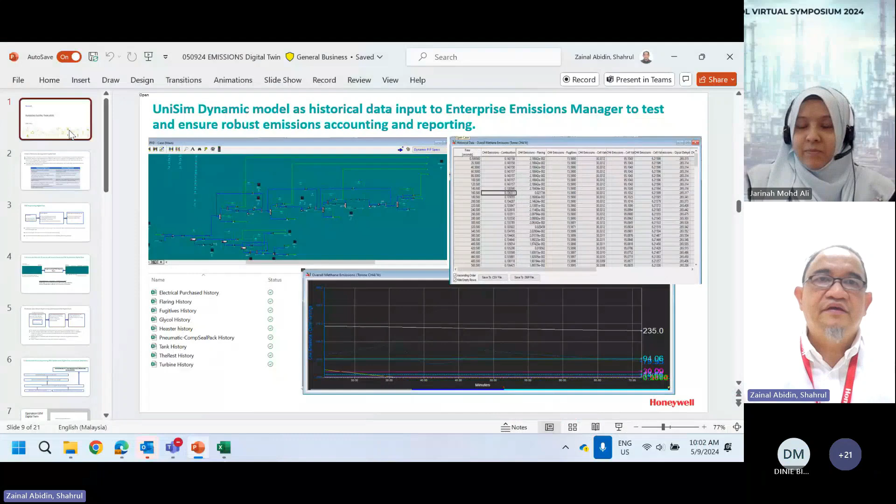My topic today will basically be on the emission digital twin. This is very close to my heart. You can see my screen? Good. The emission digital twin is very close to my heart, the reason being that it's a combination of sustainability and process modeling. For 30 years with Petronas, I was doing process simulation from my day one in Petronas until the day I retired, and I've used many process simulation tools throughout my life.

The emission digital twin is a representation of the emission, especially for greenhouse gases, GHG, and it can be categorized into two types of emission management digital twin, namely the engineering digital twin and the operation digital twin. What this emission digital twin does is combine a process simulation model and operation historical data. Meaning you cannot say to your boss that you don't have the data from the plant or operation, because you can actually generate those data from a first principle model.

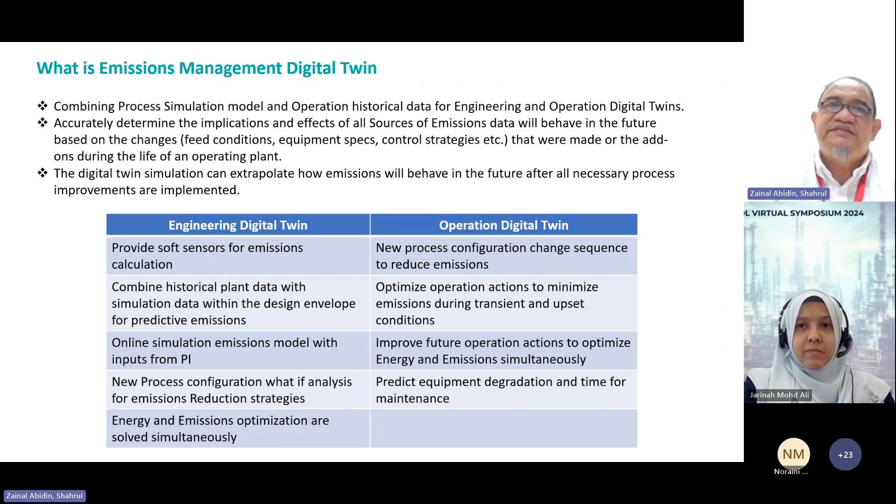When you want to come up with a digital twin data historian or data lake, you need to combine process simulation data, which some people call synthetic data or simulated data, with the operational data so that you have a complete data lake throughout the operating envelope for the process of interest. If you rely solely on operational data, typically it won't cover the whole operating envelope. That's the reason you need to combine the process simulation model data with operational data.

With complete operating envelope data, you can accurately determine how all sources of emission will behave in the future based on your process condition change. It can be a feed condition change, feed composition, temperature, pressure of the operating condition, and it can also be equipment spec or control strategies. But equipment spec and control strategies are more related to the operational digital twin.

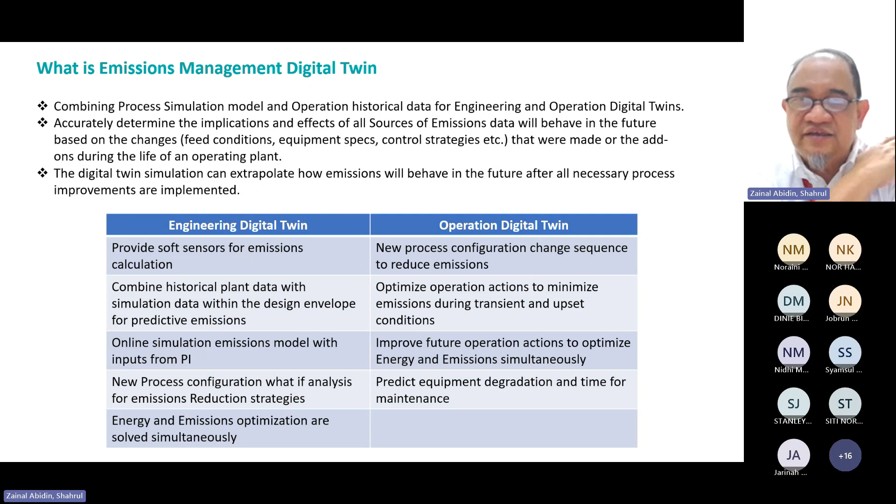Then you can also use operational digital twin to improve future operation action to optimize energy and emission simultaneously. But this time, the operation digital twin is in dynamic mode, so that you can actually see how the process is changing with time by looking at the energy and emission simultaneously. And at the same time, you can also put in the equipment degradation. You can predict the equipment degradation and timing, and tie in the findings with the maintenance team.

Okay, moving on. This is the simplified architecture of how the engineering digital twin looks. So you have your data historian, or in this case, I just use PI system, and you have the real-time data, including historical data. Then you combine this PI historical data with UniSim. In this case, at Honeywell, we are using the UniSim model. You can use any other simulation tool like Symmetry or HYSYS.

Then using the simulation model, you can come up with the first principle plant model. You can do energy optimization. You can do emission soft sensors. You can also do what-if analysis in terms of emission reduction. Then finally, you have this dashboard of engineering digital twin, where you can achieve emission optimization as well as emission reporting. Basically, the engineering digital twin combines transmitter measurement emission input data and actual plant simulation data soft sensors to create the emission digital twin.

And it can be done accurately for all 13 emission sources, and also historical trending of the emission for all the 13 sources identified in OGMP. And you can also use engineering digital twin to generate the inferential model to represent the hard sensors, so that the hard sensors can be relocated to other places, and you can use the hard sensor to tune the soft sensor model from time to time, especially when you detect that the soft sensor or engineering digital twin starts drifting in terms of giving you the accurate result.

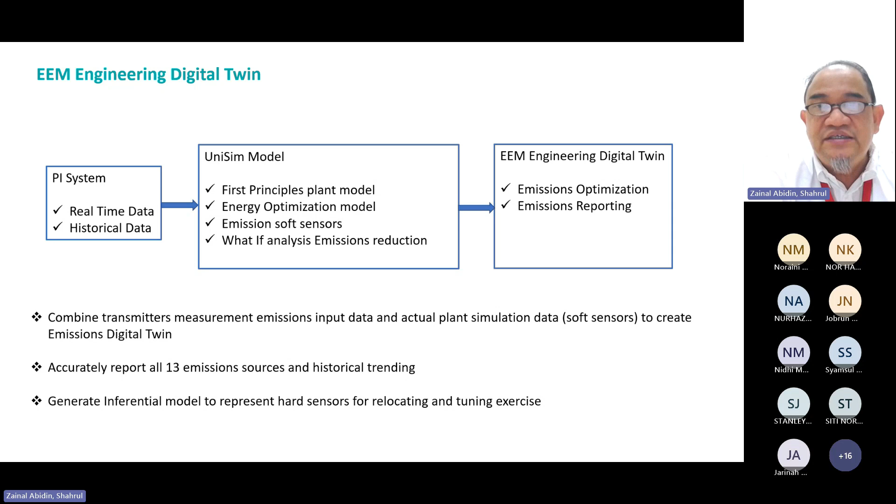So soft sensor is good. Reason being, you cannot put hard sensors all over the place because hard sensors are very expensive. And that's the reason that at Honeywell, we really recommend soft sensors as well, to come up with the inferential model for your particular emission source, so that from time to time, you only need a small number of hard sensors to retune your soft sensor in the case where the model starts to drift.

Okay, this is some graphical information, and you can see that first you need to develop the Unisim model for your process. In this particular case, it's an upstream model, and you combine it with your LDAR report to segregate between leakers and non-leakers, and then you start to model the fugitive emission coming from the LDAR report. And with sufficient emission data and an inferential model, a fugitive model can be developed as well.

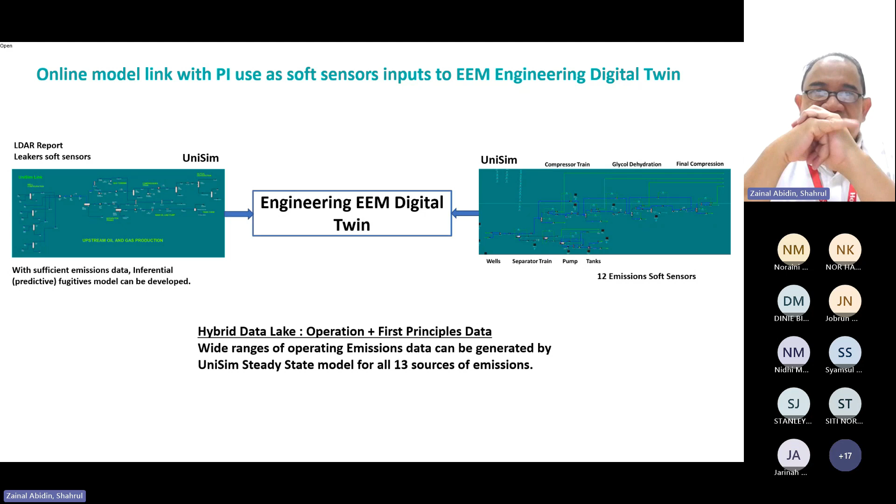Meaning you can see from year by year how the leak propagates with time. So from there you can collect the fugitive data year by year, and from there you can have machine learning to actually predict what will be your fugitive emission for all the devices identified in the LDAR report. LDAR meaning leak detection and repair.

On the left, you can see those are for fugitive, and you can use the same model to model the other 12 emission sources for the soft sensor in terms of flaring, venting, stationary combustion, pneumatic devices, acid gas removal, storage tanks, and so on. You can do it in process simulation tools. So, in short, the engineering digital twin is a hybrid data lake of operational data plus first principle data, and a wide range of operating emission data can be generated by the process simulation tool for all 13 sources of emission.

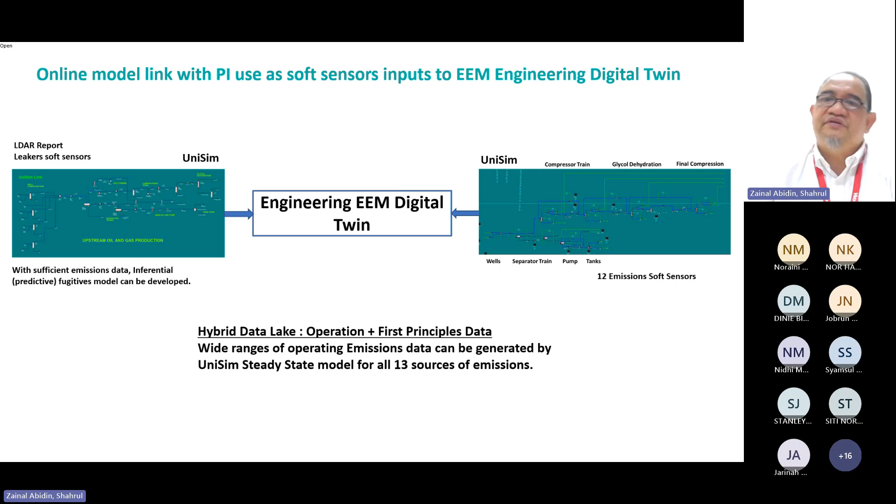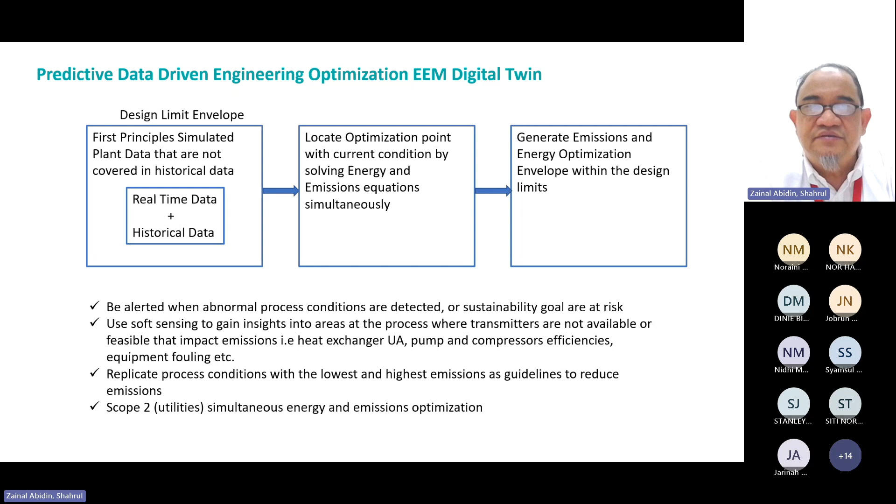So you can trend at what condition your emission is the lowest and highest. The lowest emission and lowest energy, or energy optimization, is the one that you want to replicate. And the highest emission is the operating condition that you want to avoid. So it will give you actionable insight, the do's and don'ts during operation, in order to get energy and emission optimized simultaneously. And you can also do scope 2 emission of the utilities in terms of simultaneous energy and emission optimization. All right, moving on.

This is just the optimization digital twin in terms of graphical representation. Again, we move from the bottom, historical plus real-time plant data historian. And you combine it with the first principle simulated data, then you have this data-driven model within the design envelope. Then you do the predictive and optimized energy and emission model. And finally, you do the prescriptive action to reduce the emission.

And we have the data-driven model on the second layer from the bottom. And this is where you will send it to your emission dashboard. In Honeywell, the dashboard is called Sustainability Plus, or we call it S Plus, a visualization tool to portray or visualize the emission condition at any given time.

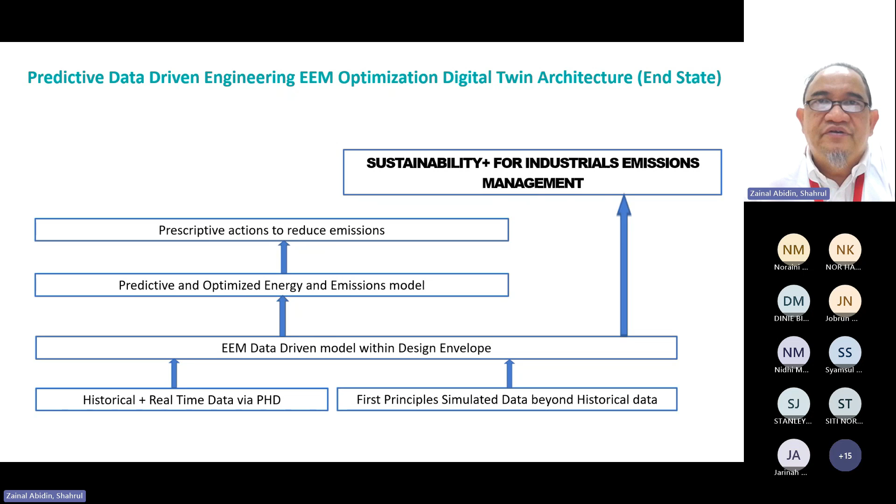All right. Now we move on to the second type of emission digital twin, which is the operation emission digital twin. And this is where the OTS dynamic model comes in. OTS means operator training simulator, based on UniSim, or it can be any other simulation tool.

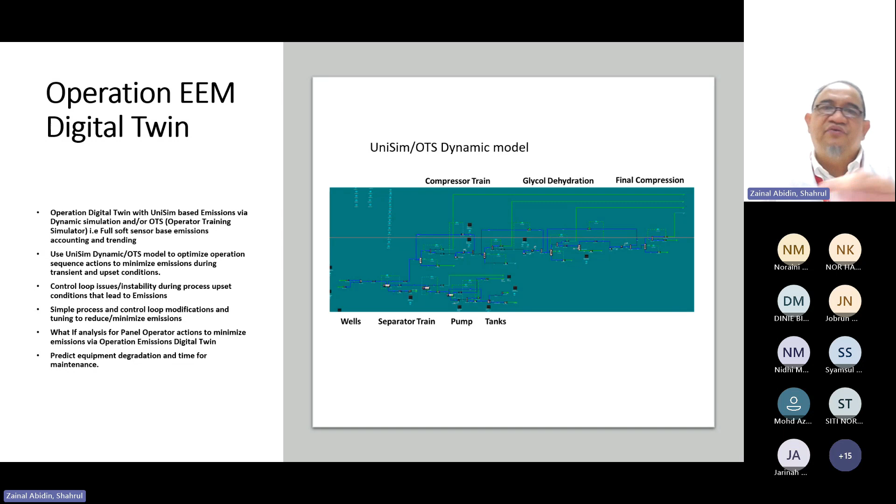And you can also do a simple process and control loop modification in order for you to get the best in terms of controllability and to minimize the emission. And you can also do the what-if analysis for the panel operators' action to minimize the emission through the operation emission digital twin. And last but not least is to predict the equipment degradation and time for maintenance.

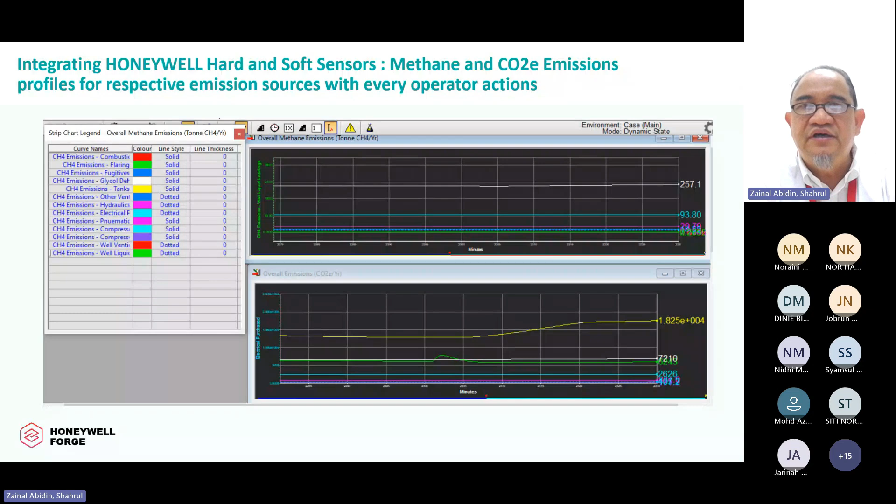Moving on, this is how the operation emission digital twin looks like. This is the process simulation tool outlook. You can see that on the left is all the emission sources, and you can actually look at each of the emission sources and how it is changing with time for any panel operator's action. So this is in real time, and it can give you a lot of insight in terms of what to monitor, so that you can maintain your emission within your limit.

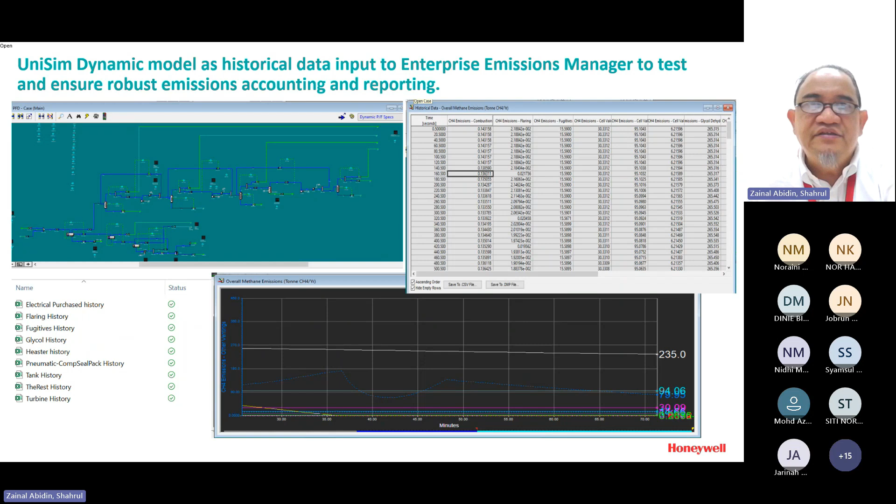Okay. And moving on, this is also another graphical representation of the operation emission digital twin, and you can actually play back the dynamic model by reading data coming from your historical data that you store in PHD, so that you can trend the emission, and also you can learn from the emission trend what are the best operating conditions to minimize the emission.

And you can link this dynamic model. Okay, this is how you can link this. You can see the top left is the dynamic model, and below it is how the DCS looks like. You can actually send this data to your data historian, to the PHD, that has the same graphical user interface as your DCS, so that you can do all the changes not directly from the process simulation tool, but from your mimic DCS interface. So all changes by operators can be done through not the actual DCS, but a mimic of the DCS, so that you can see the actual emission at any given time.

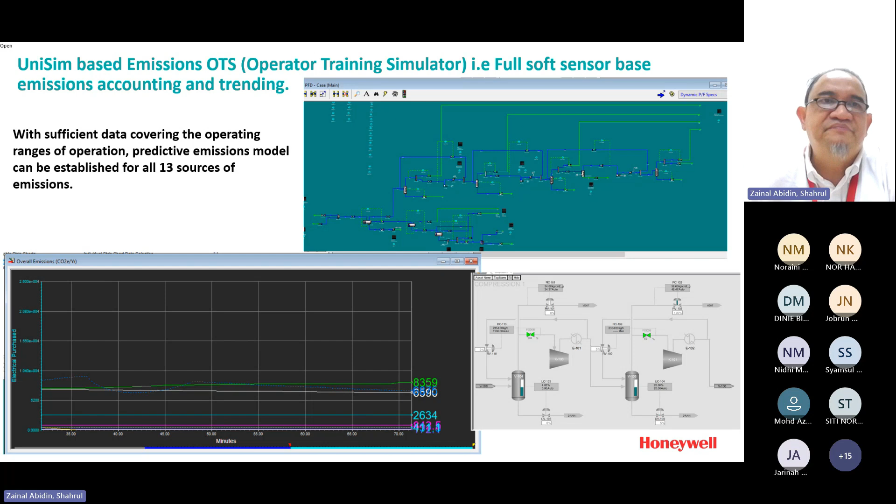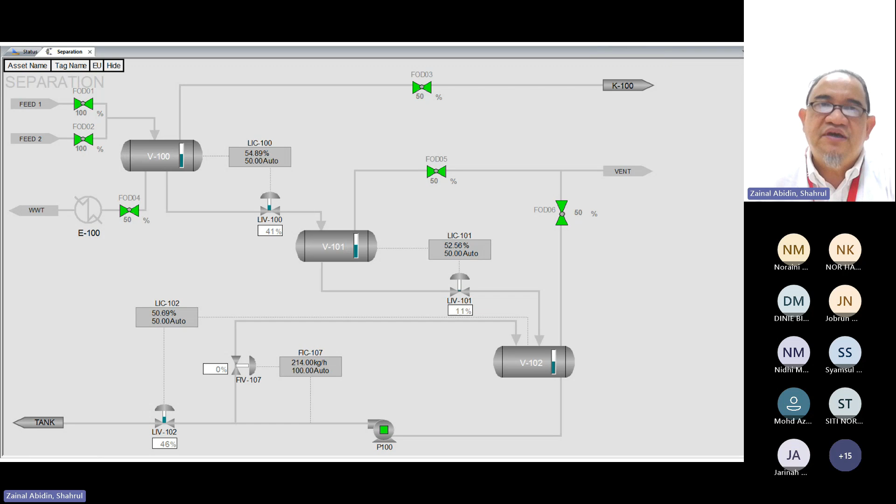And this is how the operation emission digital twin looks like. You will replicate your exact DCS, and all changes need to be done by the operators through this interface, because not everybody is able to use the process simulation tool regularly. So that's why we came up with the exact representation of the plant similar to the DCS graphics. So any action will be done through this interface.

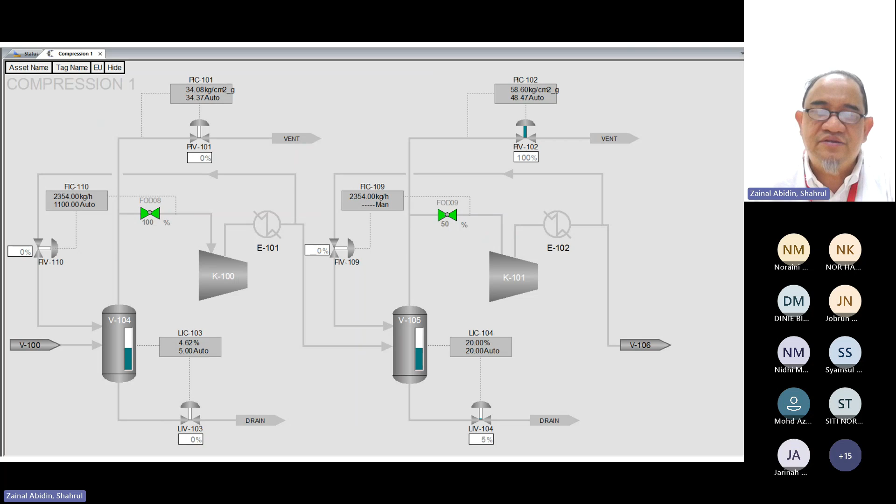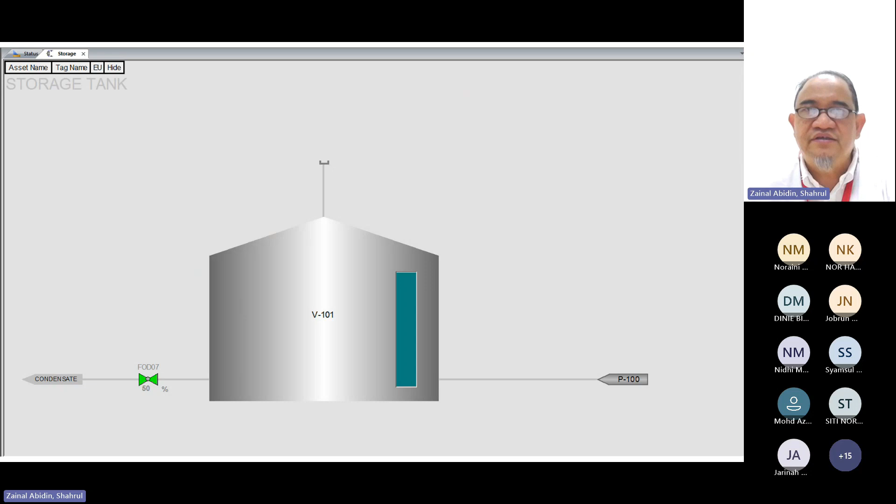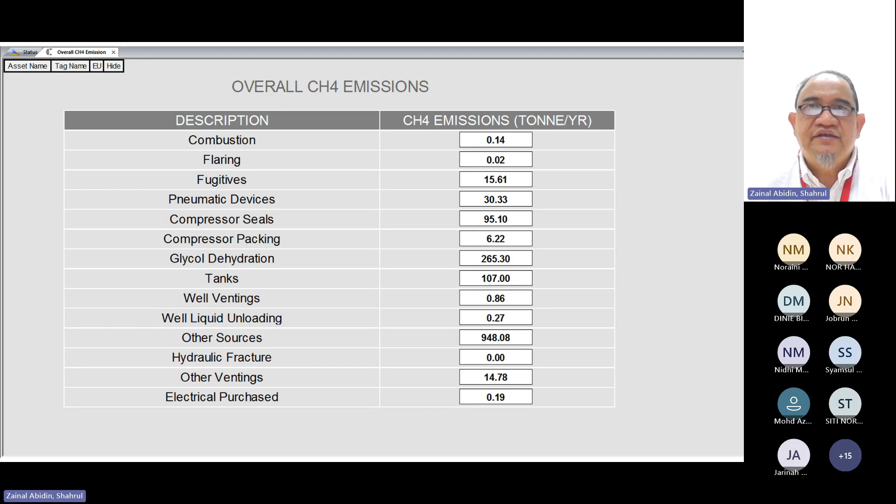So this is the separation unit. This is the compressor train unit. All changes can be done here. And this is the second train of the compression. And we also have this tank located in the terminals. Okay. And it also gives you the overall CO2e emission coming from the digital twin. This is CO2e, this is methane, and we can also show the CO2 as well. And this is the trend that you can have from the digital twin.

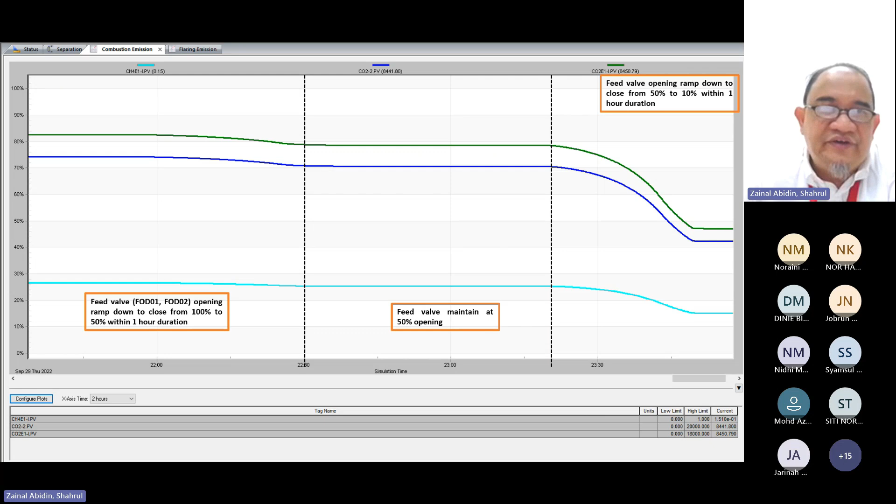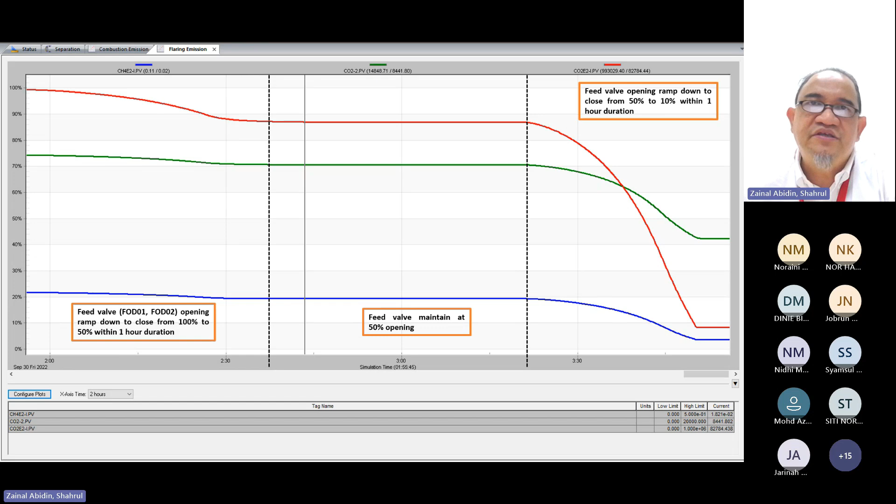You can trend what happens if the feed is maintained at 50%, or you can ramp down from 100 to 50% within 1 hour. You can see how the emission is changing with time. And similarly here, you can shut down any valve so that you can see how the emission is actually behaving, so that you can reduce the emission in your facilities.

It seems like you are using UniSim for this project. So what is the difference between UniSim and Aspen? Because currently a lot of us have been using Aspen Plus, Aspen Dynamics, and so on. Okay, good question. Aspen has two software, namely HYSYS and Aspen Plus. And as you can see, UniSim is very similar to HYSYS. In fact, UniSim can read a HYSYS model, and I'm not sure whether HYSYS can read a UniSim model or not. I believe they can.

And Aspen Plus is different. Aspen Plus is owned by Aspen, and as you know, HYSYS and UniSim originally came from Hyprotech, then to Aspen, then Aspen had to give their source code to Honeywell, as well as keep one copy, and another party I can't remember. Now they are all the same. If you ask me, they are all process simulation tools. What makes one process simulation tool different or better than the rest, including Symmetry actually, is the thermodynamic package that they have in place.

In Symmetry, I know Symmetry very well, iCON Symmetry, because I also developed iCON during the iCON development stage together with VMG when I was with Petronas.

The only difference is what thermodynamic packages are available for you to use. One thing I know is that if you key in your composition slate, most process simulation tools should be able to automatically detect the available thermodynamic packages based on your selected composition. They will filter out the property packages that you cannot select based on your composition. For instance, if you have all hydrocarbons, then the parameters will be there.

But once you put in methanol, high water content, CO2, and high pressure conditions, the software will automatically filter out the property packages that you cannot use. In fact, you cannot select those property packages. So to answer your question, they are the same, but the only difference is the thermodynamic packages they have in place in their respective process simulation tools. I hope I answered.

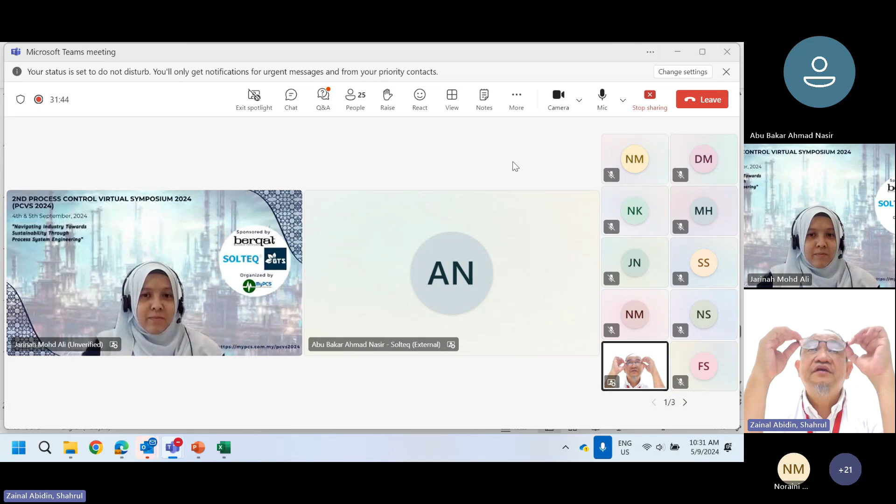I just want to ask about the sustainability goal, particularly emission. How ready is the Malaysian industry, in your opinion? Okay, Malaysian industry emission, in terms of GHG, is mostly coming from the oil and gas sector. People always confuse the difference between GHG and CAR. CAR means the air quality gases versus the GHG gases. CAR is already in place, the Clean Air Regulation, something like that.

Now CAR and GHG are totally different. CAR is concerned with air quality, meaning SOx, NOx, CO, CO2. They are concerned only with that because it will pollute the environment, and it's not good for the people surrounding it. Now GHG is different. GHG is focusing on methane, CO2, as well as N2O, and also the refrigerants used by cars, lorries, and all motorists, because those are GHG gases. And the impact of GHG gases is different compared to the air quality gases, SOx, NOx, and so on.

GHG will impact the ozone layer, and will also increase temperature globally. Now Malaysia has already committed to curbing global warming, and Petronas is a member of OGMP, the Oil and Gas Methane Partnership. Not only Petronas but also other companies, Exxon, Aramco and so on, need to report their emissions, especially methane, because methane is more dangerous compared to CO2 in terms of impact.

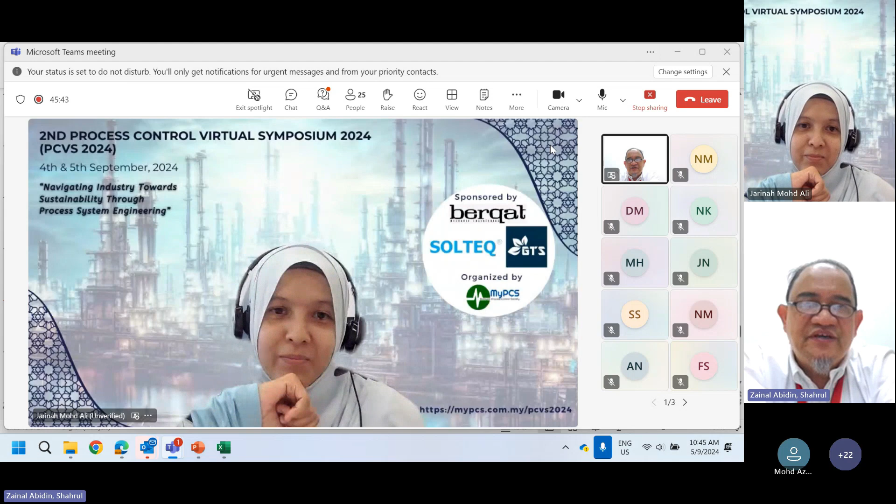What simulation tool is used by APU? Dr. Sang is from Vietnam. Oh, Vietnam. Sorry. Yeah, that's fine. I assume most people use UniSim or HYSYS. Okay, Vietnam, I need to speak English then. Okay, now.

Typically, the way I select, I try my best to select the equation of state first. If the equation of state cannot do my job, then I go to the activity model. Why do I like to choose equation of state? Equations of state like Peng-Robinson, Redlich-Kwong, are good for gases, because they are based on PV = ZRT. The difference between one equation of state and another is how they derive the Z factor.

I had the chance to meet Professor Peng, I remember in 2016 or 2017. He's a professor from the University of Saskatchewan in Canada. He came to Petronas; I invited him to officiate our ICON conference. When I asked him the same question, his answer was: try your best to stay in equation of state if you can. But if you cannot, then switch to an activity model like Margules, Wilson, NRTL, those kinds.

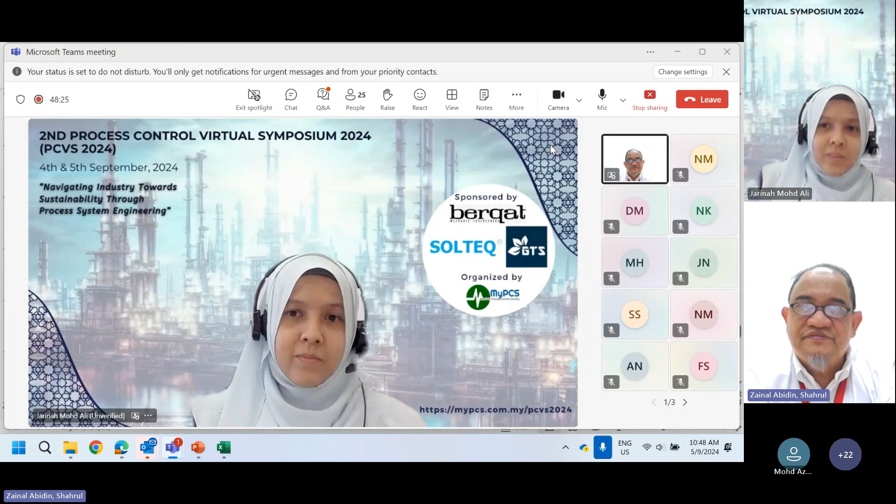All right. So I hope that answered Dr. Sang's question. We have time for one last question. Dr. Sang is following up on the Z factor, asking whether that is the compressibility factor. Yes, it is the compressibility factor. And he gives a quick comment: thank you for the guideline. I think we have no further questions.